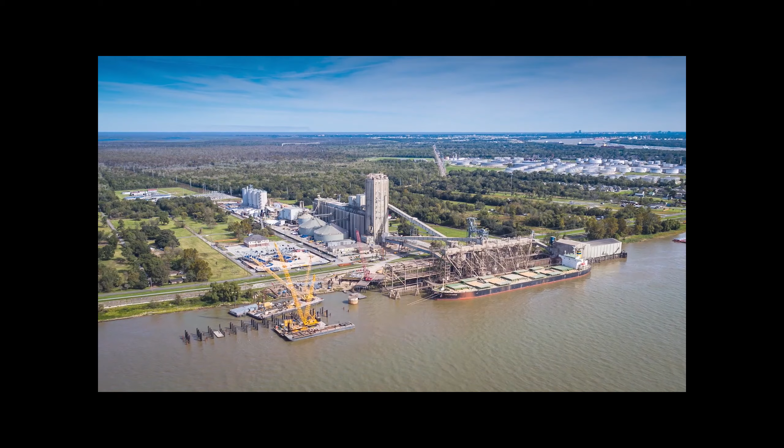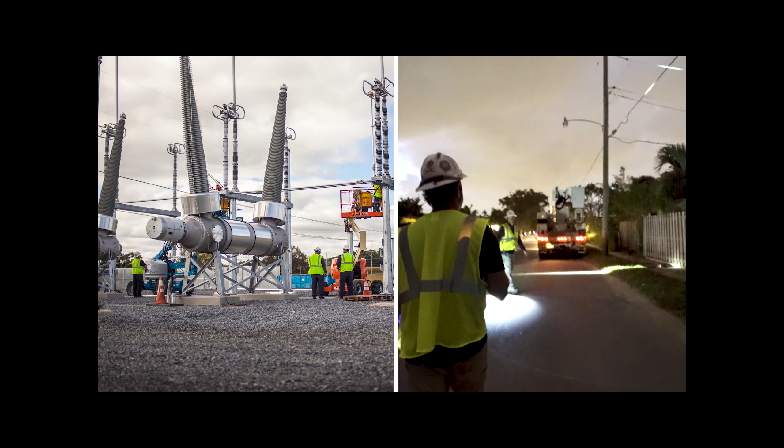Just a little note on the Matrix family of companies: Matrix PDM Engineering, which is what this team today is comprised of. We also have Matrix North America Construction, one of our construction companies, mainly working in the Northeastern region as a union contractor. Matrix Service, which most of you are familiar with, is our tank division, building not only tanks but tank farms, piping, and industrial applications. Matrix Applied Technologies is more of a products division, building geodesic domes, with offices in South Korea and Australia. Matrix PDM has 4 locations where we perform the engineering.

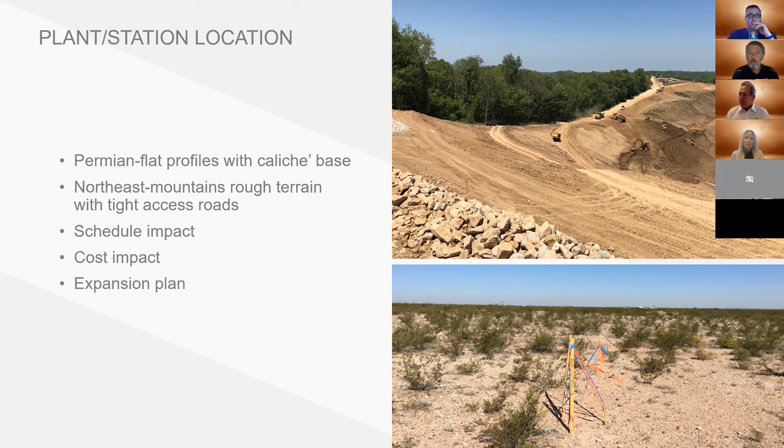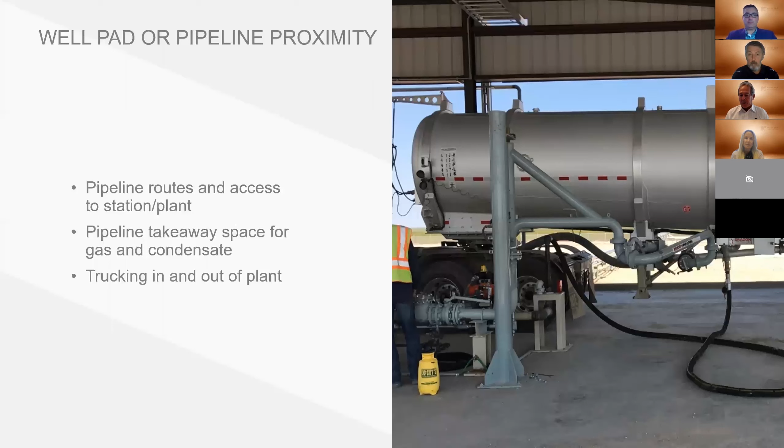One of the other considerations, or a few of them, are your pipeline routes and access to these pipelines and stations and plants, your pipeline takeaway space for gas and condensate, and whether you'll be trucking product, condensate into the plants for processing, or even trucking product out.

Taking advantage of the duplication opportunities to make these plants almost identical, but also allowing for variations and changes of different types of technology packages that may be coming in, and also considering the maintenance aspect, to be able to leave room for access to get into the equipment.

But the intent was to almost duplicate or cookie-cut, so that we have real schedule and cost savings on not only the engineering but the construction access, to be able to much more quickly bring the plants on.

Paul, I just wanted to make sure we're going through all the slides here. I didn't know, it looked like we skipped over a couple slides from that picture. I might be wrong, but I had some. We did, I'm back to them now.

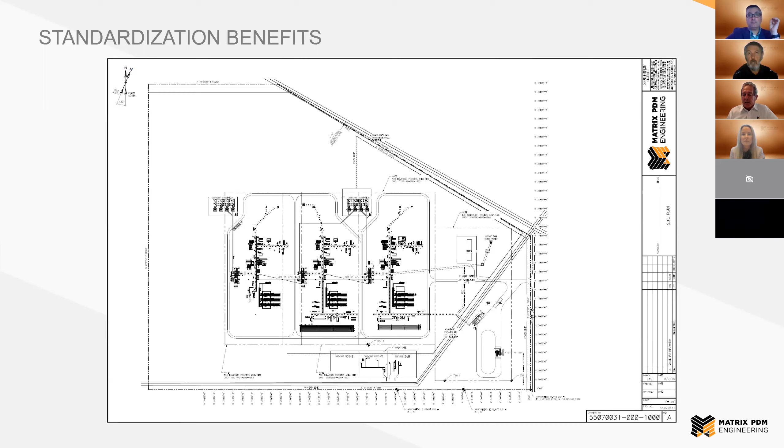In phase 3, almost every bit of engineering was able to be reused. You want to have an engineering company that's able to check it, verify it, and just make sure you're on the same page. But it really sped up the project from an engineering aspect and also a construction aspect.

Hey Paul, well, one thing you'll probably mention later, but there's a real benefit to the future operation and maintenance of those plants as well.

When you standardize them, you have more common maintenance practices and things that can be achieved as well. That's correct, Gary, and that's a good point.

One of the key items that go with that is your spare parts. If you have common technology partners for many plants, just as in this case with 3 plants, you still only need to have maybe 1 set of spare parts, and the maintenance consistency is there and much more attainable.

That's another aspect as you select your engineering and construction partners - somebody that has the ability to offer the latest technology in their designing and engineering practices to make sure that all of your bases are covered in the design of your project.

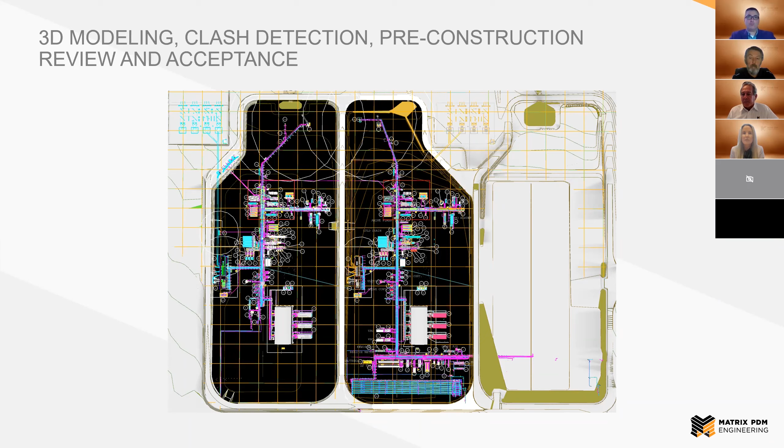The intent of this picture is just to show a site that's under construction, but right adjacent to it you can see the pad that's designed for Plant 2. So from the beginning stages, even though it may be years away before you intend to expand, when you select your site you can have cost savings by adding tees and valves and things in Plant 1 in preparation for possibly going to Plant 2.

With modularization, you get much improved safety, because most of your fabrication is in a controlled environment in a fab shop with a lot of repeatability. You get improved productivity because you have the same people building them over and over again, similar to what Henry Ford came up with for the early model Ford cars. You get improved product quality because of that repeatability.

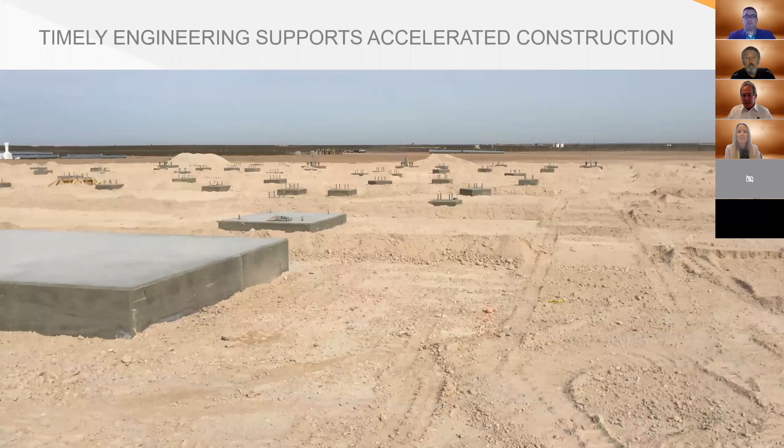Timely engineering supports accelerated construction, and the example I'm showing here is the ability to ultimately engineer nearly all of the foundations well ahead of the time the equipment is going to be arriving, so that the construction group almost has a blank sheet of paper to go out with their survey crew, lay all of this out, and perform the construction on the foundations well ahead of the arrival of any of the equipment or pipe racks or anything. So from a safety and time aspect, it really speaks volumes to the ability to maintain your schedule.

Some other construction considerations when selecting your construction partner: is it in an area where you'll need union or non-union options to consider? You will look for their safety performance, and that's so critical in all projects. You want somebody with proven construction management, somebody that's done this over and over, somebody that's willing to work with you, that wants to develop that relationship and continually aspires to meet your needs.

So you've got the plant built, it's in service, and commercial comes and we need to expand. So what are the possibilities? What are the considerations? Do you add processing equipment? Did you discover that now you need a sulfur recovery unit? Or do you need to move more gas through your plant? Do you expand it? Do you build another plant? Do you duplicate it? So there are a lot of considerations once you get your plant in operation.

So do you go to plants 1, 2, 3, and 4? As I said earlier, you want to plan for that early. You want to design for expansion early to allow that to minimize disruptions to what you've already built. And you want to construct with expansion planned and in mind.

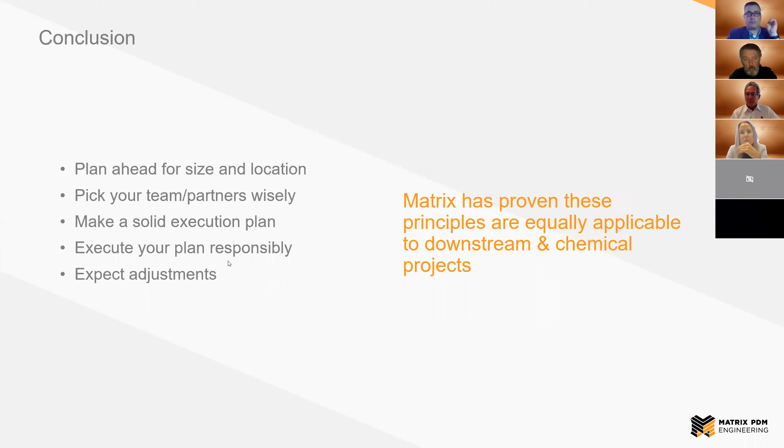Now in one of your slides, it was mentioned as union or non-union option. What was that? Can you go back one or two slides? There was something called union or non-union option, what is the terminology used? Is it a flanged mechanism you're mentioning, or?

Well, here in the U.S., certain areas have very strong union presence. You mean the labor, industrial labor issues? Correct, yes.

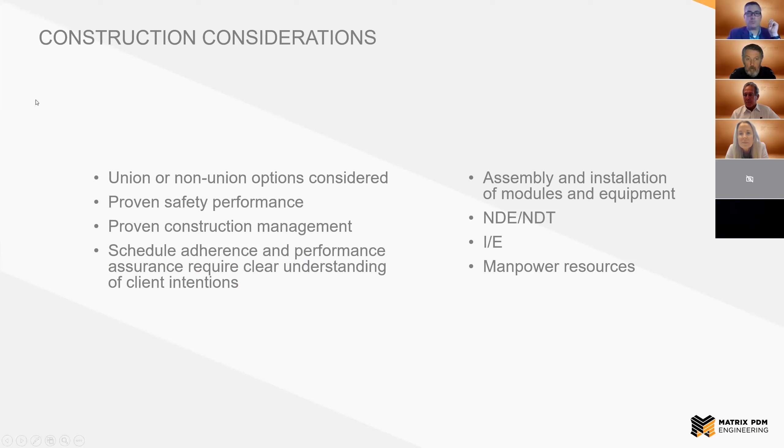Thank you. And by the way, has Matrix PDM done any jobs in India or in the Asian subcontinent, just for academic interest?

I don't know of any projects that we've completed in India. We have done some in Asia, and we continue to work some in the Middle East, but I'd let Jim be more specific. He, as you can tell by the beard, he's been here longer than I have. Thanks, Paul. No, I'm not aware of any projects that we've actually fabricated, shipped, or installed in India, at least not in my career.

However, we do have partners in India. If you have a project that needs to be looked at, we'd be more than happy to take a look and put you in touch with our partner.

Sure, thank you, that's a good call, Gloria. And just so you know, we do have partners strategically all around the world that we work with, and we try to team. As I started the conversation, you need to pick your team very carefully, and typically, if you have something, feel free to reach out to either myself, Gary, or Gloria, and we can team you up with our partners that are more strategically located to work with you.

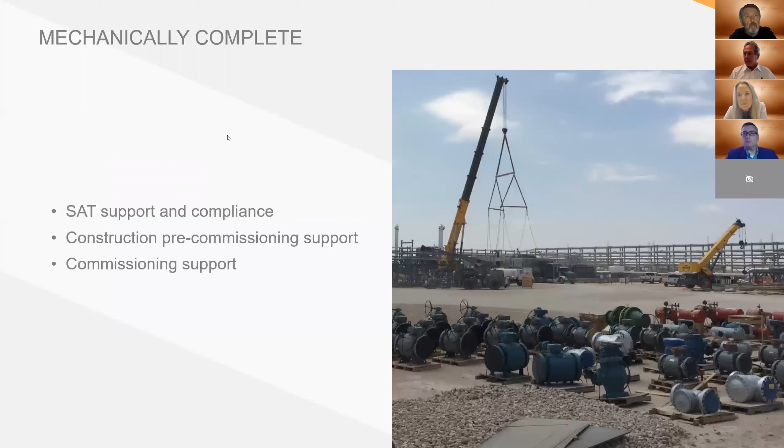I wanted to go back to the CII slide that completed the study of 7 consistent projects that were duplicated - it's a much more in-depth study. Personally, I can comment a little bit better on my personal experience and our experience here at Matrix. I know you'd like for me to put a number on it - is it 80%, 70%, 60%? I don't have the complete evaluation of it, but as an estimate, from the first plant to the second plant, we probably had about a 10% savings in engineering and construction, and then by the third plant, it was probably at least another 10%, and maybe even more on the engineering and construction.

And the design is still there, and with this particular client, nearly every new location, the comment is, let's just take that same plant and duplicate it over here. So it's not only the repeatability, but also the standardization of the equipment, the technology, and all that goes with it that supports that.

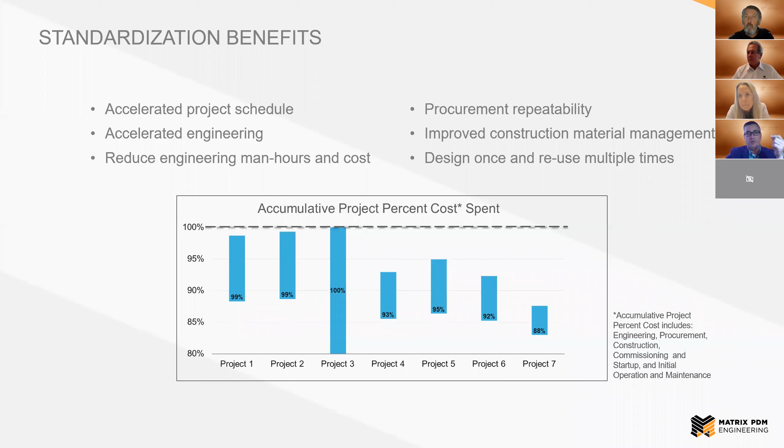Paul, would it be safe to say that a lot of customers have learned over the last several years in the shale boom, where they've learned the benefits of standardization and modularization, and they've gotten more mature with regard to standardizing equipment and things like that as well? So they've gotten better at it as well, which helps the engineering and construction partners.

Absolutely. Any portion of the project that you can repeat with like equipment - but be warned that even though we may design all of the foundation for the whole plant, for all of the technology package in one area, and you wish to build that 40 miles down the road, that does not necessarily mean those same foundation designs will be applicable, because of the geotech report and the ground concerns, or is it in an earthquake zone or anything.

So I don't want to mislead you to think that every portion of a plant can be picked up and carried to another state and every piece of it duplicated. It may be, but you have to do some engineering consideration on that before I can make a broad statement like that.

Sure, I have a follow-up question to that from the same person. How do you incorporate lessons learned from the first phase of the execution into the second duplicate phase?